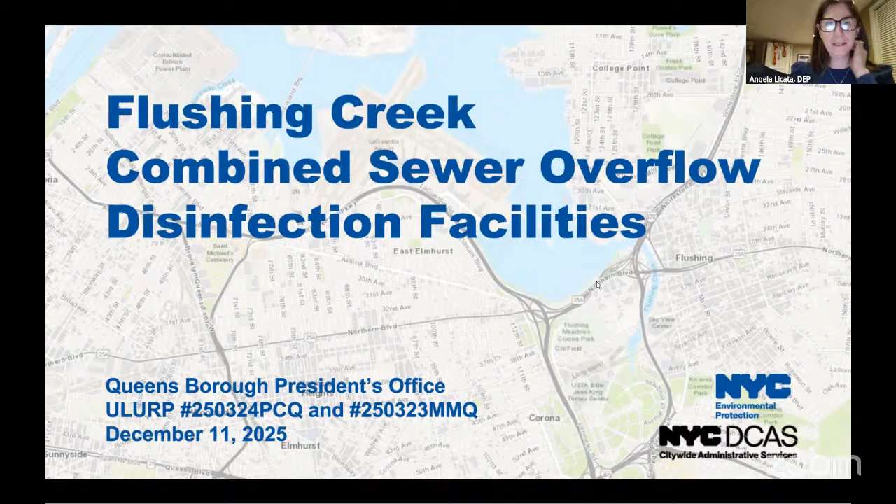Alfonso, are you there? Okay, then I will begin for Alfonso. My name is... Hear me? Angela. Sorry, go ahead, Alfonso. Sorry, my mute was acting up.

Good morning. This is Alfonso Lopez, Queens Commissioner for DEP. Thank you all for the time today. Just going to go through briefly who's here on the line from DEP. We also have Monica Harvey, Bureau of Engineering, Design, and Construction. Angela Licata, our Deputy Commissioner for Sustainability. Mitchell Wimbish, Bureau of Environmental Planning and Analysis. Keith Mahoney, Bureau of Sustainability. From Arcadis of New York, we have Timothy McDonald. And from AKRF, we have Carrie Sibeli. I'm going to turn it over to our Deputy Commissioner, Angela Licata.

All right, thank you very much for the introduction. We wanted to give a brief outline today to talk a little bit about the project purpose, our objectives, talk a little bit about how we have designed this project and provide you with some of the data that we have collected and studied. We will provide you with the analysis for the environmental documents and provide you with our conclusions. And then we will review the schedule for this project for its ongoing design and for its construction. Next slide, please.

So first, a little bit about DEP. Most of you will know that we are the city's agency responsible for providing drinking water services to over 8.25 million people within the city, another million people upstate in our watershed. And we also are responsible for distributing that clean, potable drinking water and collecting all of the wastewater. And that includes stormwater and sanitary sewage.

And approximately 60% of the city's sewer system is what is known as combined, stormwater and sanitary flow mixed together in one pipe. So again, 60% of the sewersheds are combined, probably another 30 or so are separated, where you have one sanitary pipe and another stormwater pipe, and about 10% run directly into the city's water bodies.

The problem with combined sewers, and this is a legacy problem in a lot of older cities, is that when it rains a sufficient amount, that system does not carry that flow all the way to our water resource recovery facilities for treatment. The city has 14 water resource recovery facilities, but when the flow exceeds 2 times their dry weather capacity, we have what are known as combined sewer overflows.

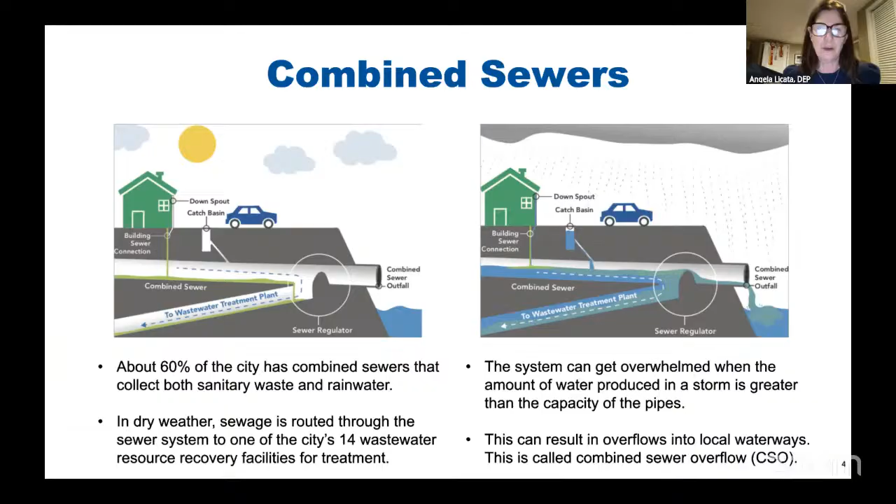So we have a consent order with the New York State DEC, and we are governed under the Clean Water Act. That's a federal policy. And what we need to do is to meet a series of best management practices, is what they're called. We want to continue to improve our water bodies until they can all meet a swimmable, fishable standard.

Now, having said that, that's a very difficult task to achieve because New York City is blessed with 520 miles of coastline, and our water bodies are vast, and we're really an archipelago. So we have a lot of water bodies to manage, and some of these water bodies are really quite man-made. And so getting them to achieve, like you would see in an ocean-fronting beach, a swimmable, fishable standard is again really quite challenging. But nevertheless, we have been developing programs to get us closer and closer to these goals.

And that is why we have proposed for Flushing Creek a disinfection program. Typically, under our CSO program, what we try to do is capture that CSO, detain it, store it, and pump it back to one of those water resource recovery facilities that I spoke about earlier once the rain event subsides. But in some cases, like in the case of Flushing Creek, that is a very difficult thing because we have over 1 billion gallons of CSO going into Flushing Creek every year.

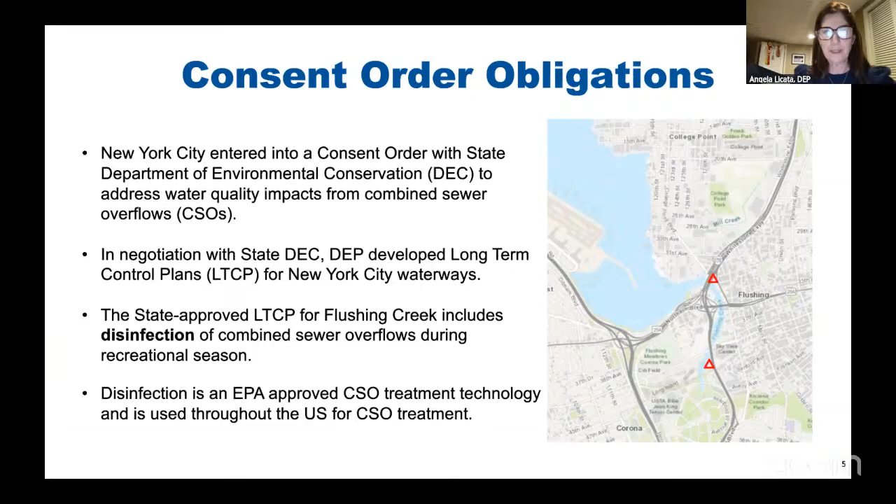Okay, thanks, Angela. So as Angela mentioned, the CSO program has a long history. It started back in the 1990s, and there were a lot of accomplishments to date. Flushing Creek was one of the largest ones. We constructed a 43 million gallon CSO retention facility just upstream of CSO outfall TI-10. So that's a massive CSO storage facility.

But even with that storage facility, there's still over a billion gallons going into Flushing Creek. Previously, it was over 2 billion gallons going in. So we significantly reduced the CSOs. But again, it becomes very challenging to try to reduce that remaining 1+ billion gallons.

Aside from that, we also have a very comprehensive green infrastructure program, and there's a lot of green infrastructure in this area. It's a huge sewershed upstream of Flushing Creek, and to date, DEP has constructed over 2,000 GI assets in this drainage area, and we continue to implement more GI. And citywide, we call this our baseline CSO commitments. This is prior to the long-term control plans. We've already spent over 2.7 billion in gray infrastructure, and we've committed to spend 3.5 billion in green infrastructure throughout the city.

We also made other improvements in this area, including some sewer upgrades, and we constructed a new parallel interceptor to convey more wet weather flow to the Tallman Island treatment plant. So again, a lot of investments have been made to date in this area, but it's still a challenging area. Next slide, please.

So as part of our 2012 consent order, we were required to develop what we call CSO long-term control plans. And we submitted 11 of these citywide. All 11 have been approved by DEC. And in this, we look at what we can do beyond what we've already committed to. So it builds off of that 43 million gallon tank and the GI we committed to. So this is what's in the future, what we can commit to.

So as part of this, we call this kind of a toolbox, but there's a whole different list of alternatives we can look at, including disinfection, which was actually required by our regulators, New York State DEC, to be included in the toolbox. So we have a lot of system optimization, like some low-cost things that were done previously, and those are much more cost-effective things.

As you start going down this list of storage, it becomes very expensive, as Angela mentioned. For instance, the Newtown Creek, that 50 million gallon CSO storage tunnel, has a cost right now of $3.4 billion. So it becomes very expensive. So again, when we have these alternatives, there's what's called the knee of the curve analysis. It's basically a cost benefit analysis.

So we looked at all these alternatives and saw how they reduce CSO, reduce bacterial loadings, and most importantly, we did an evaluation of how they improved water quality attainment with the applicable bacterial standard. So based on that, we selected the most cost-effective alternatives for each water body. It just so happened in Flushing Creek, disinfection was by far the most cost-effective. And that's how we came up with disinfection.

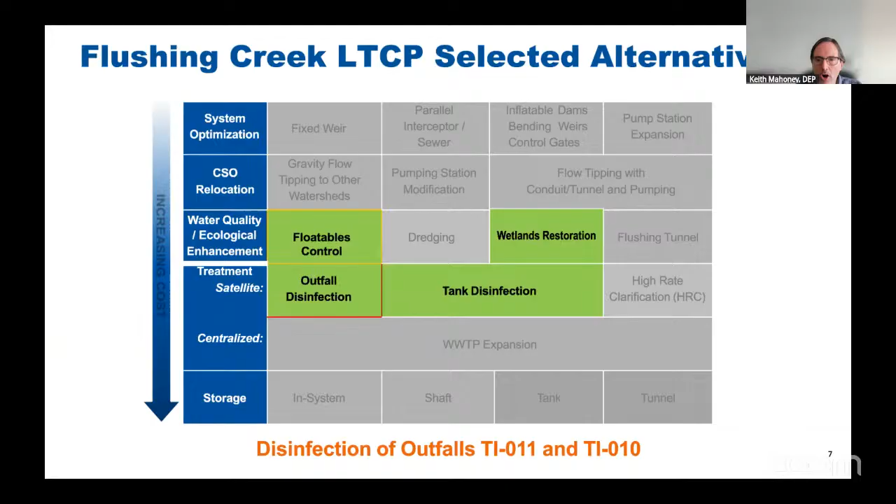So as part of this project, we have floatable control, disinfection and a long outfall, as well as disinfection at the existing 43 million gallon tank. And another project that we committed to outside of the long-term control plan was a wetland restoration that we're doing with the Army Corps of Engineers. So that's a project I'll get into in the next slide.

So these are some ongoing or planned improvements for Flushing Creek. Again, I just mentioned the Flushing Creek wetland restoration. So we're looking to construct 19 acres of habitat, including taking out some invasive vegetation, some regrading, placement of clean cover in the creek to grow the new plantings.

In terms of, I mentioned the GI we already constructed, we're also committed to additional GI as well as a cloudburst management program. So this is kind of a hybrid of GI with storm sewers, roadway improvement. It's really meant to help mitigate inland flooding, but it also has a CSO reduction benefit. So we're pursuing these citywide to try to address climate change and increased precipitation.

We also have ongoing throughout the city sewer separation projects. As Angela said, about 60% of the city is combined. It's almost impossible to make it all separate, but there are pockets where we have opportunities to separate sewers. And we're looking at some within the Flushing Creek area where we'll take some pockets of sewers, separate them, and send the additional flow to either Meadow or Willow Lake. So that gets the stormwater out of the combined system, but again, incrementally.

And I did mention this early green infrastructure program. Again, we're doing this citywide, and we committed to spending $3.5 billion by 2040. And to date, I think we probably spent about $1.3 billion or so.

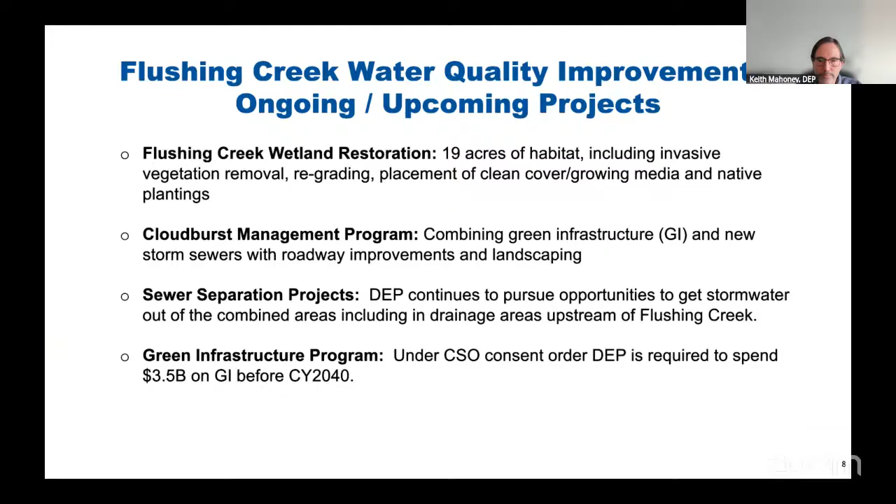This is just a timeline for the long-term control plan. As I mentioned, the CSO programs date from the 1990s. We started the LTCPs back in 2012 with the amended consent order. We submitted Flushing Creek in December 2014. We had public engagement. We had 3 public meetings for every LTCP to discuss the whole process, the alternative evaluation and the recommended alternative.

DEC approved the Flushing Creek LTCP in March 2017. We started design for this disinfection project in January 2019. And we're approaching design completion. And right now we're in that process where we're reaching out to the borough president and looking to get the lands and just proceed with this project. The next phase is construction coming up.

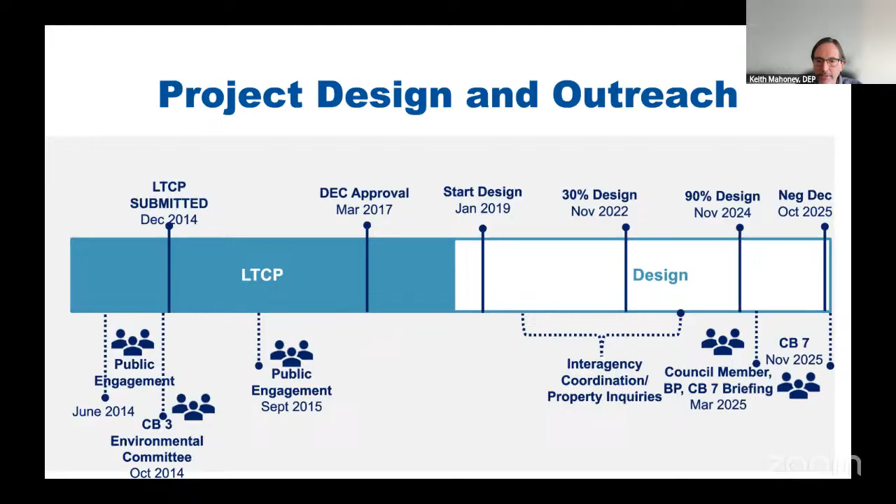And I'll hand this one over to Mitchell. Thank you. Thanks, Keith.

All right, so for this project, as we've been talking about with this disinfection, CSO is going to be chlorinated to kill the harmful bacteria and viruses that are in the CSO effluent. And then another chemical will be added to dechlorinate the flow to protect the ecosystem of Flushing Creek. And we are designing this amount of chlorine in the effluent, and we have a limit of 0.1 milligram per liter. That's the DEC's limit that we have to meet all the time in order to protect human health and safety during recreational uses.

So we're looking to construct 2 facilities. So on this map, the triangles are the outfalls. So that's TI-11 at the top, and then TI-10 at the bottom. And so for TI-11 at the top, we're looking to construct a new facility on 32nd Avenue, right below the Whitestone Expressway. That's a current traffic triangle owned by State DOT. And then for TI-10, we'll actually do the chlorination within the CSO facility that's here in purple on the map.

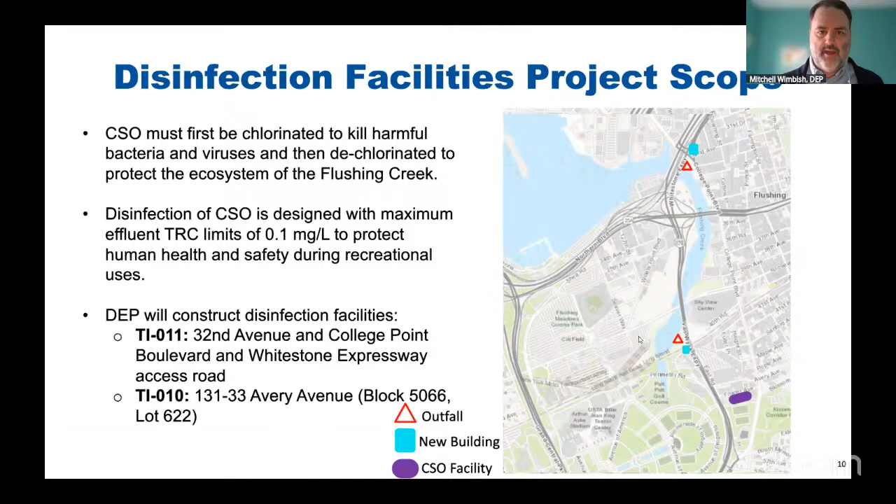And then the dechlor will be in our new building on Avery Avenue. And that is a portion of a lot owned by the Home Depot that we will look to acquire once we have approval. Next slide, we'll just go through the ULURP actions like I'm talking about. So we can see a little closer here.

So for both sites, we need to site select and acquire. And then for the TI-11 site on the top, we have to do a mapping action because it is currently mapped roadway, part of the Whitestone Expressway access road. So we need to change the city map so that we can make a new lot to build on. And then you can see below, we're just acquiring a portion of the Home Depot lot.

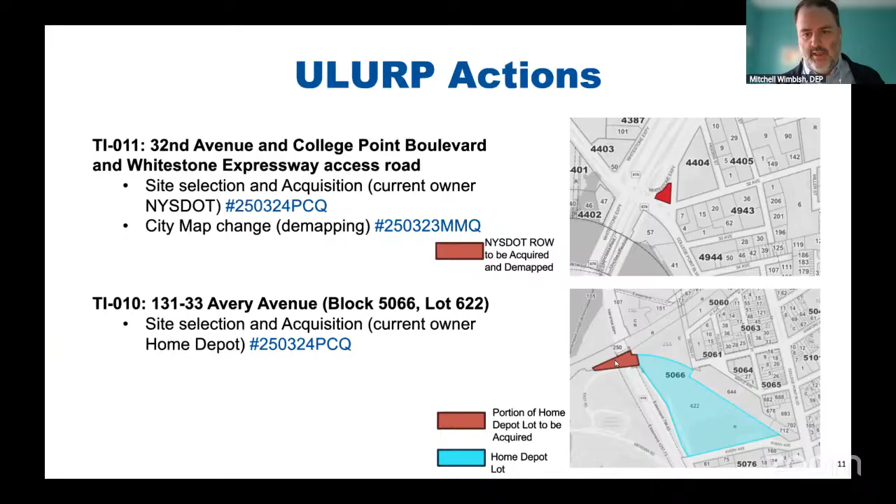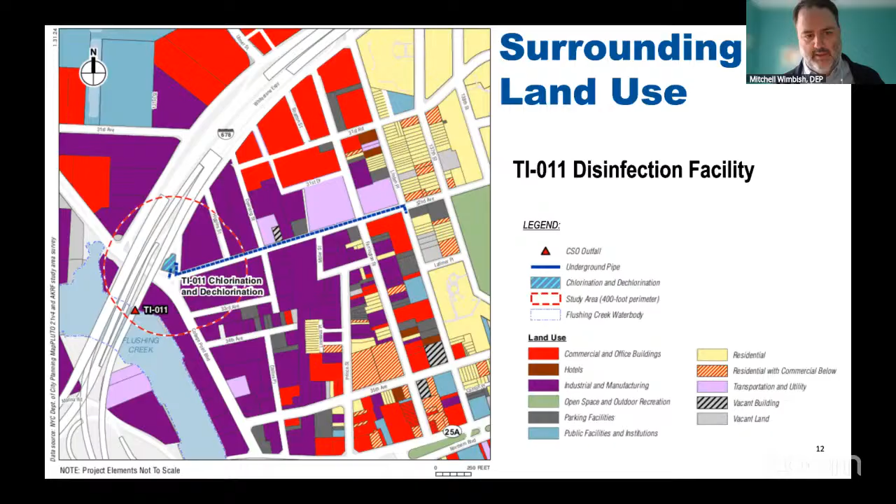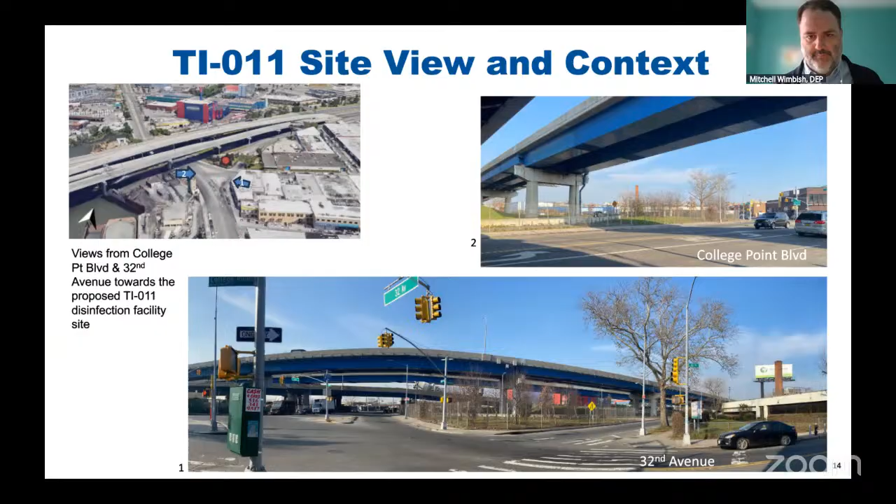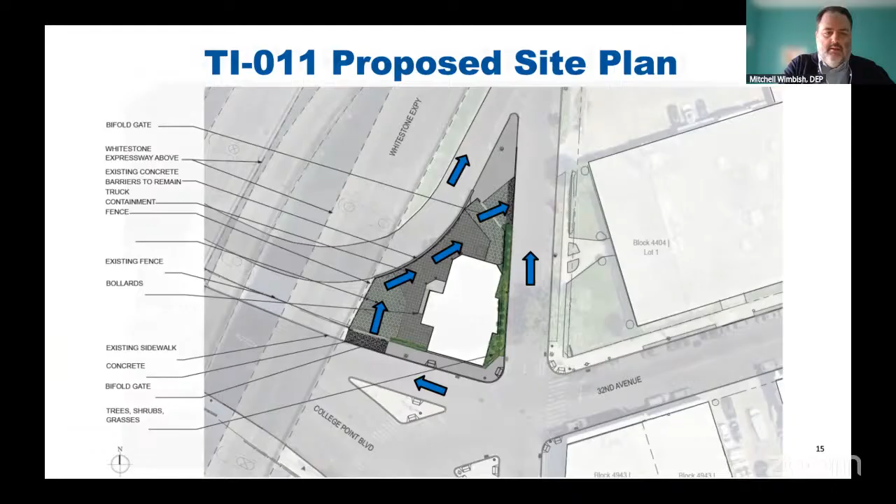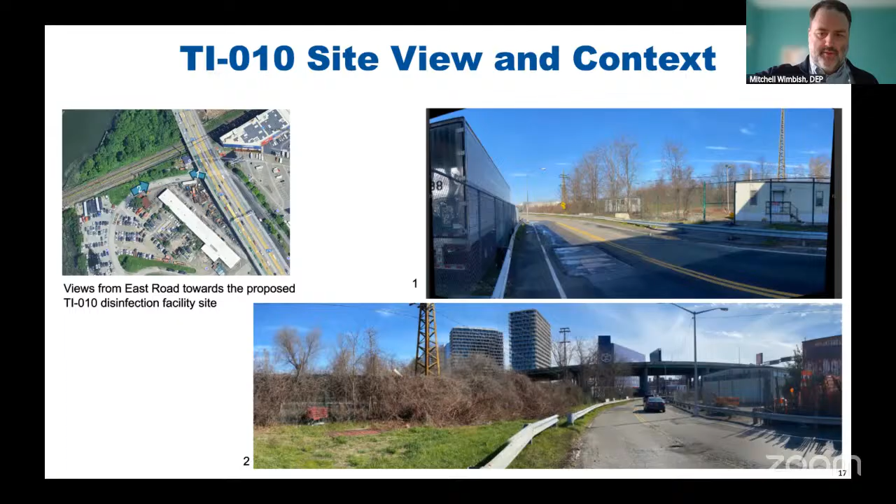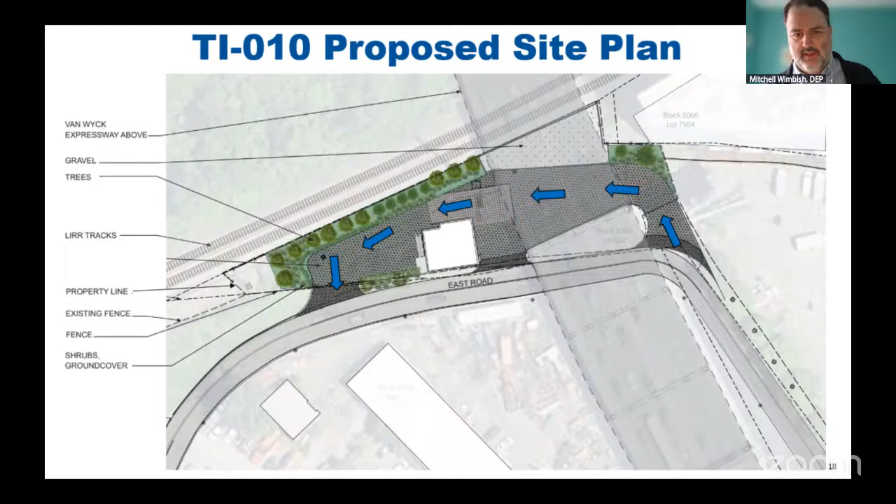Yep, thank you, Mitch. So Arcadis picked up where essentially Keith's team with the long-term control plan finished off. And it's our responsibility to now come up with the physical design of the new facilities and to figure out how they're going to be implemented and constructed to achieve the project goals. So to do that, one of the first things we did was we revisited some of the sewer system modeling that the long-term control plan team had looked at. And we built upon that and basically enhanced it to take into consideration future projections of population and then also what's happening in our environment with climate change.

So what you see on the right here, this is a map of the entire sewershed area for the two Flushing Creek outfalls that we're talking about today. That's highlighted in the red area within the map. And then the green represents the combined sewer areas and the blue represents the separated sewer areas. So as you can see within that red outline, there's still quite a bit of area that is considered combined.

And so we use sewershed hydrologic and hydraulic modeling to take a look at when it rains, what happens within that red area. Where does the rainfall go? What catch basins does it go into? What sewers does it get into? How much of it collects in the sewer system during some of these wet weather events? And how quickly does that water move through the sewer network and out to the outfalls? And also, how much gets to the two outfalls that we're concerned with for TI-10 and TI-11?

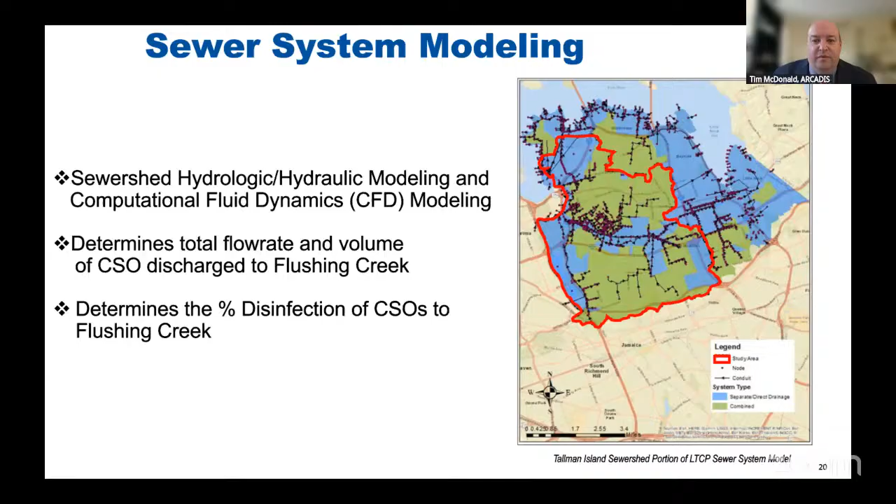So using that modeling data, we get a sense of what happens during a recreation season. The table here shows at a very high level for the two outfalls, the top row is for TI-10, the bottom row is for TI-11, how many overflow events occur during the recreation season that result in water going out to Flushing Creek. For TI-10, it's about 8 events in that recreation season period, which is from May to October of every year. For TI-11, it's about 23 events.

The reason being it's higher there is that in TI-10, we have the Flushing Bay CSO retention facility, the big tank, the 43 million gallons of storage that Keith referred to, that helps mitigate the amount of events that would actually overflow to the creek. From a durational perspective, this just shows the total duration during the recreation season for when these overflow events occur. On average, it's about 16 to 18 hours per event. Some of them are shorter, some of them are longer, depending on the rainfall intensity and the duration of the storms.

As Keith mentioned as well, it's about 1.3 billion gallons of water that goes to the outfalls for CSO overflows in the TI-10 system. In the TI-11 system, it's much less. It's only about 222 million gallons. So when we look at where we're adding the chemical and where we're targeting, we get a sense of how much we're able to disinfect. And in both cases, for both outfalls, we believe we can achieve about 91% disinfection of the CSO flows that are going to the creek. And in both cases, that exceeds the target that New York State DEC identified in the long-term control plan, which was to achieve 88% disinfection of those flows.

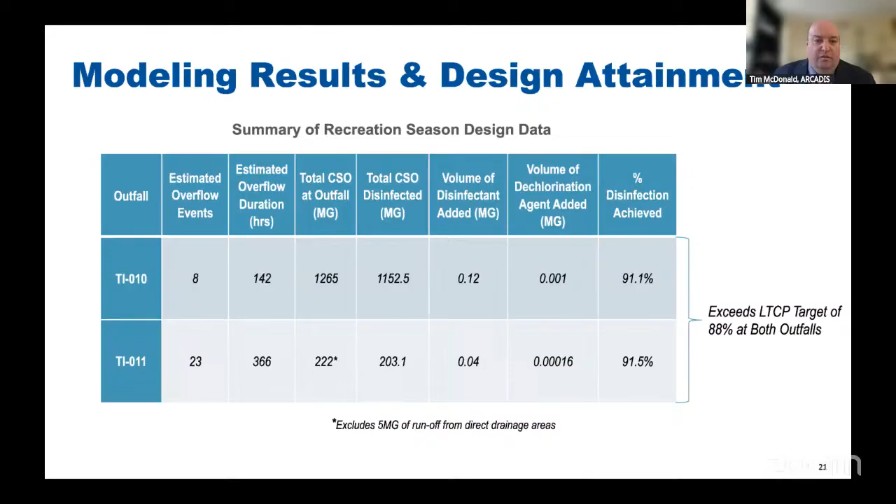And then just for comparison here, we also have a couple columns there where we call volume of disinfectant added and the dechlorination agent. And you can see the amount of chemical that gets added in relation to the amount of CSO flow that goes out to the outfalls is very low. It's orders of scale less than what goes out in terms of total stormwater flow. Next slide.

So just to give some understanding of how the system operates and why these facilities are being sited where they are. What we have here on the screen is an aerial view of the TI-10 sewershed area closest to Flushing Creek. The creek's in the upper left. Outfall TI-10 is in the red triangle. And then the blue shading there represents the sewer conduit and the sewer network that goes to that outfall. As you come back, you've got sewers that go down Avery Avenue and Fowler Avenue over to College Point Boulevard. The bottom center of the screen, the big blue area, that's the existing Flushing Bay CSO retention facility tank.

The water in the sewershed comes from two sets of conduits, which are in the right-hand corner of the screen. There's a larger conduit that comes from the Kissena corridor that runs under the Queens Botanical Garden, and then another pipe that comes from what's called the Park Drive East sewer that goes up College Point Boulevard. Normally these flows get conveyed to the Tallman Island wastewater resource recovery facility. In wet weather events, when the flow is too much for the treatment plant to handle, the flow starts to back up in the sewer network and it's directed into the CSO retention facility tank. The idea being that we capture that flow in the tank, and when there's capacity at the Tallman Island plant, the captured flow gets pumped back to Tallman Island.

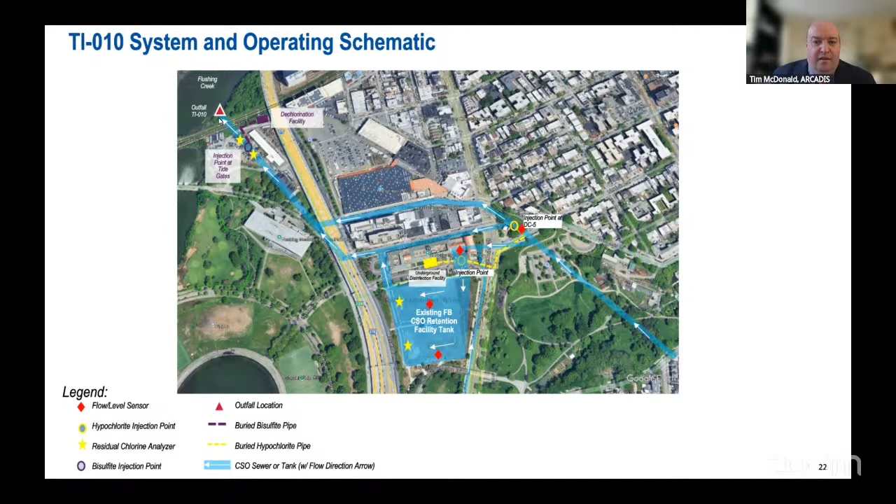So here's the TI-11 system. It's a little simpler. The big difference being that there's not a retention tank. So on the right-hand side of the page under Linden Place is the sewer that goes up to the Tallman Island Water Resource Recovery Facility. And so when it can't handle all the flow, there's a regulator that's called TI-R09 that's at the intersection of Linden Place and 32nd Avenue. The flow would overflow at that location into the sewer outfall pipes that go out to outfall TI-11 into the creek.

There's also flow coming in from the right-hand side of the page from some other upstream regulators. So when we see that an overflow is about to occur or it's occurring, hypochlorite would get injected just downstream of that regulator into the two sewers that then go down the length of 32nd Avenue. And then right about the intersection of College Point Boulevard, that's where we have those total residual chlorine analyzers to trigger and adjust the dosing of the sodium bisulfite to, again, make sure that we don't exceed the effluent residual chlorine limit that the state has imposed.

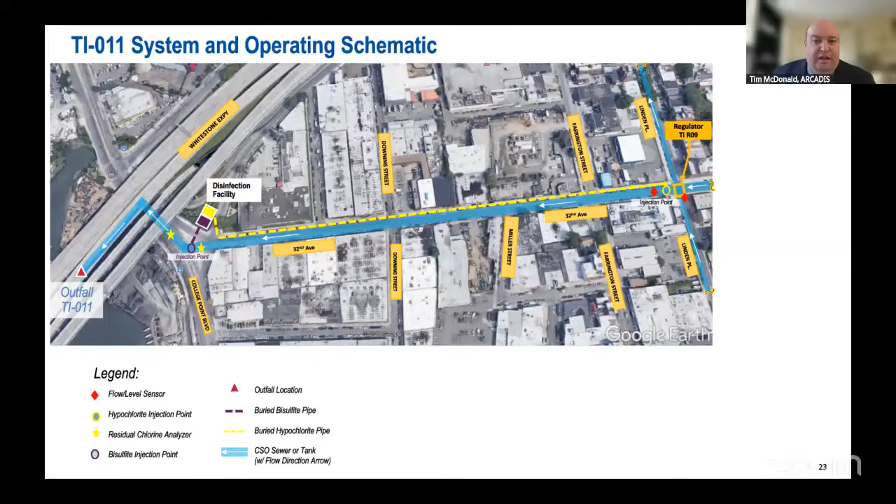Okay, so that's the reason for putting that in the adjacent intersection there to house both chemicals, because this is a very congested area and there's not a lot of opportunity here for constructing new facilities. Next slide.

So in the course of development of the project and also some of the various public outreach that DEP has conducted, there's been a lot of concern expressed from a safety perspective and the control of the chemical and making sure that there's not any negative impact to the aquatic biota in Flushing Creek. And DEP is concerned with that. And so as part of this project, we've designed a system whereby we've done all of that modeling that I mentioned earlier with the CFD, and then come up with a robust control system that's based on the same types of equipment and controls that the DEP uses at all of its treatment plants. So it's tried and true technology that's being applied to this case.

Okay, there's also some natural decay that occurs. And as that flow continues through the pipe, that uptake continues to happen and the decay continues to happen until we get to the point well upstream of the actual outfall pipe. And if there is any residual chlorine remaining that has not been taken up by the bacteria that's in the CSO, that's where we would add the sodium bisulfite to further react with the hypochlorite. And that reaction's fairly instantaneous. We have good mixing in the pipe at the locations that we're adding the chemicals.

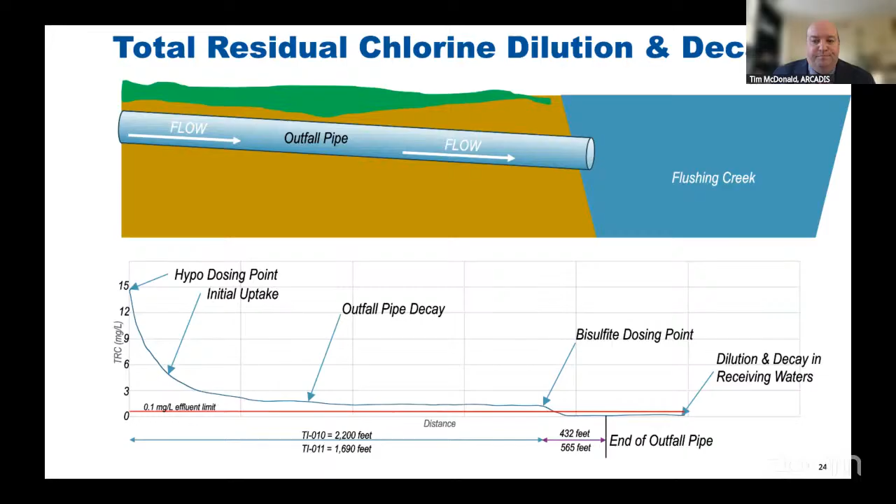And then with respect to public safety, there's been a lot of concern because we do have some buried piping that has to extend outside of the DEP's fence lines and into the right-of-ways to get out to the various locations within the sewer network.

So the piping that's going to carry the chemical, normally we would have what's called a double contained pipe. So basically you have a carrier pipe that carries the chemical, and that's surrounded by a secondary pipe around that. And that would capture any material that might leak inadvertently out of that pipe. And then in the annular space between those two areas, we have a continuous leakage detection cable that runs the entire length of the pipeline.

So if any chemical did leak out of that pipe, we could detect that, we get an alarm, and we shut down the system. It also can tell the operators to within 5 feet as to where that leak may have occurred, so they can go out and investigate it. In this case, since we're in the public right-of-ways, we're taking that double contained pipe and we're going to put it in a concrete trench box that will act as a triple containment.

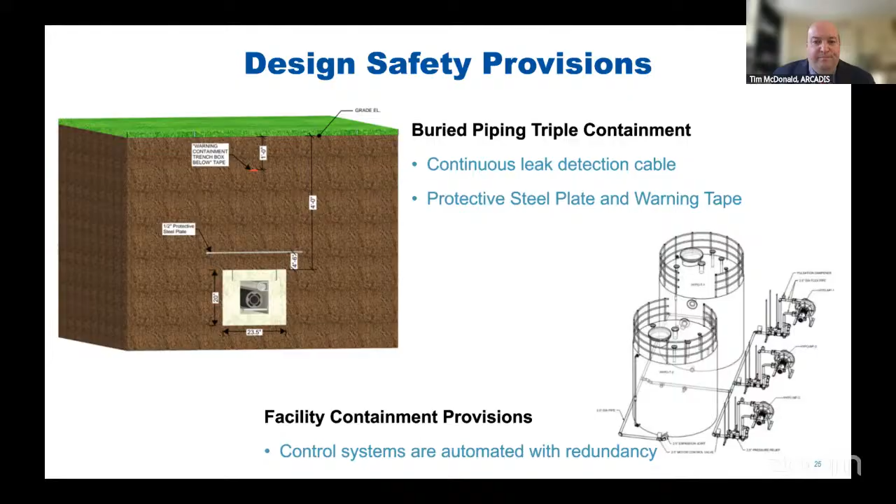Okay, and I'll turn it back to, I guess, Mitchell on the EAS conclusions, because I think Angela had to drop off. Yeah, thanks, Tim. Angela, if you're still here and want to jump in, please do so.

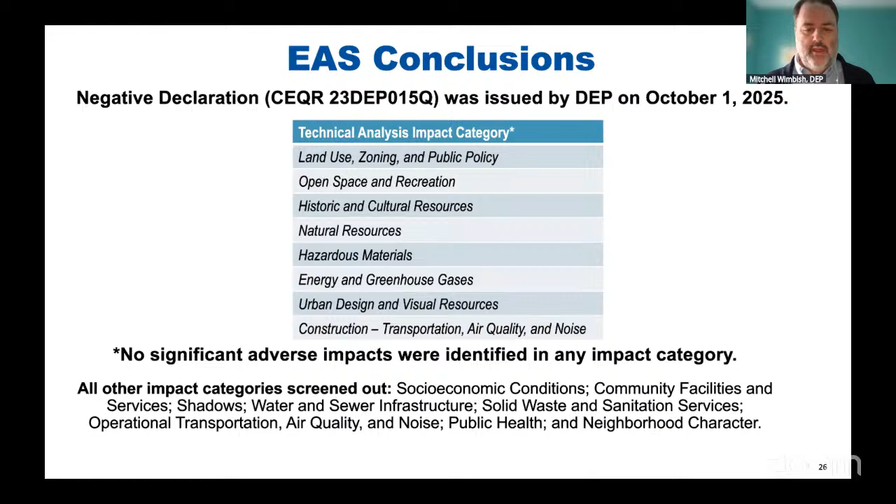But yeah, so we released our EAS in September of this year, and then had no comments received on it, and we issued a neg dec on October 1st. So therefore no significant adverse impacts were identified in any category. And then if you go to the next slide, we'll talk a little bit about our analysis on natural resources.

As Tim mentioned, we did this very detailed modeling work to really determine the minimum required dosing rates to achieve disinfection, because we did want to minimize the amount of chemical use. And we know that any chlorine that's still in the water does have the potential to be harmful. So that's why we're using both the design to have that be the minimum amount necessary, and then also using the sodium bisulfite to remove any remaining chlorine.

And as talked about before, we have both the analyzers to tell us how much chlorine is in the water and flow meters, and those are all giving real-time data to the operators so that we can adjust the dosing as storm events are happening. And we looked at other places where this dechlorination process is used, in places like Seattle that has wet weather treatment stations that disinfect and dechlorinate CSO flows that don't go to a traditional treatment facility.

And we also know that DEC has permitted this in several other places throughout the state. And often ours will have a lower allowed limit, that 0.1 milligram per liter of total residual chlorine. That's a lower limit than a lot of the other facilities are using. And also, DEP has so much experience using chlorination and dechlorination at our treatment facilities, which are run 24/7. And we do have a higher limit there that we put into the receiving waters, and we haven't seen real problems with the aquatic life.

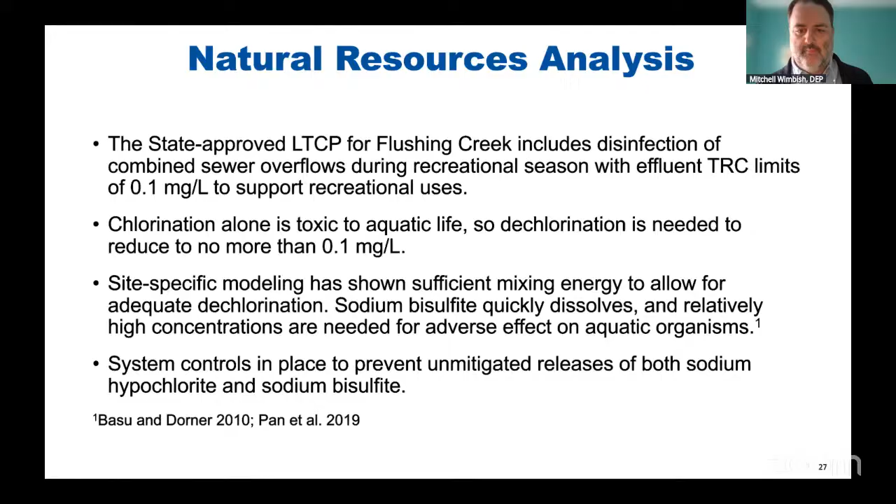And then just to highlight, I don't know if we talked about this before, this disinfection would only be happening during the recreational season, which is May 1st through October 31st. And that's really to highlight the benefits of this project, which are to remove those dangerous pathogens and viruses that are in CSO, so that people who are near the creek wouldn't become sick due to exposure to those pathogens.

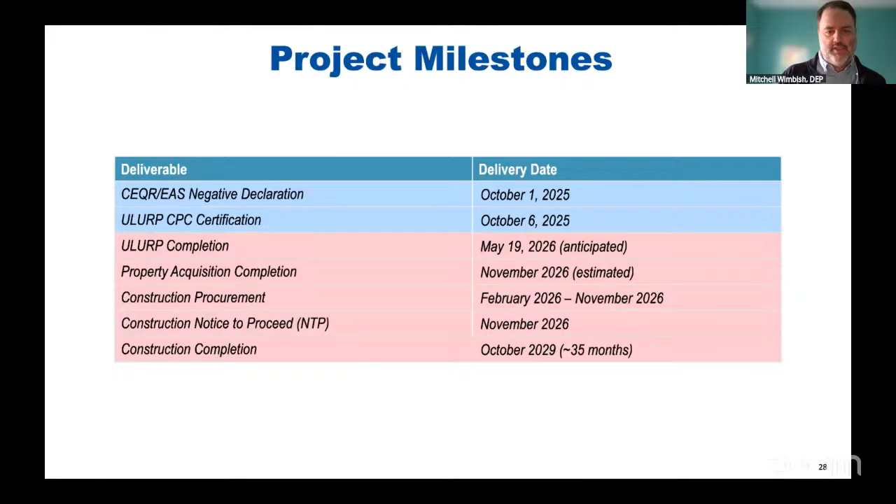Okay, thank you so much, applicant team. That was a very comprehensive presentation, a lot of information to parse through, but I appreciate it. And I appreciate that this long-term control plan has been in the making for a very long time. So I do have some follow-up questions. My first question is an overarching question that I think you did touch on, but I do just want to point out. So this disinfection facility will treat the water, but there's no plan to address the fact that billions of gallons of CSO will still enter the creek, which will include trash, physical trash.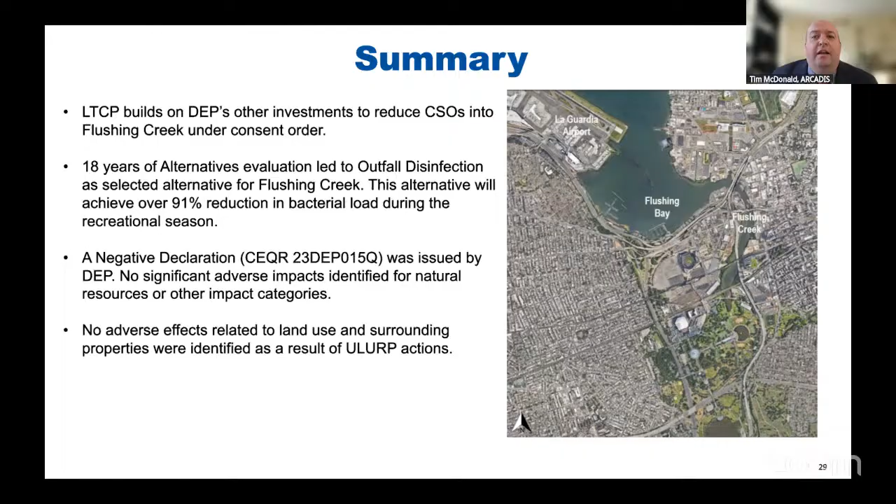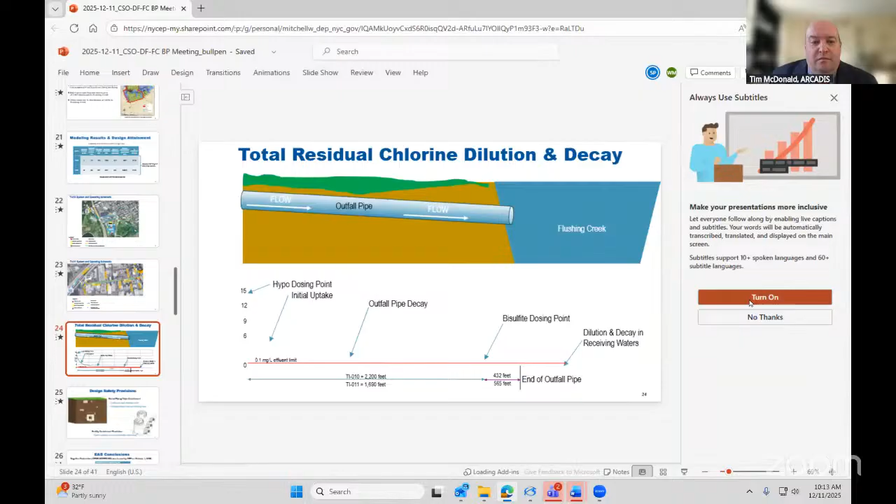Sure, I can handle that. So from the modeling, the time frames will of course vary depending on the size of the storm, the flow rate, and the duration or intensity of a storm. But in a worst case scenario, when we look at peak flow rate through the system and low tide in the creek, which is the shortest amount of time that the CSO flow would be in the pipe, we have a minimum of at least 6 minutes. And typically the durations are higher. That's the case for the TI-11 outfall because there's no tank and the pipe is a shorter length than for TI-10. TI-10's duration is generally higher, usually on the order of 10 to 13 minutes minimum. And it would be longer if you have a high tide or a lower intensity rainfall event that doesn't result in such a high flow rate.

And just to add to what Tim said. For the chlorination, that's where you kill the bacteria. That one is dependent both on chlorine concentration and detention time, so they call it CT. That's why we try to get as much detention time as you can in the outfall pipe. The sodium bisulfite, which is added to take out the residual chlorine, is instantaneous. So that's towards the end of the pipe, and that's a pretty much instantaneous reaction. Correct.

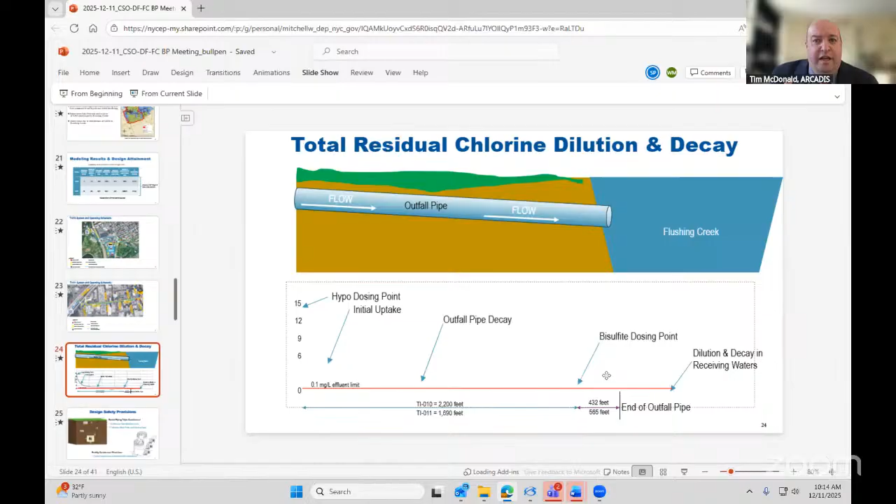And just to add to that, after the bisulfite's added, at worst case, which is minimum time in the pipe, we have around 2.5 to 3 minutes between when the bisulfite gets added before that water gets to the end of the outfall pipe. So at other times, the duration could be longer. Again, it depends on the flow rate going through the system.

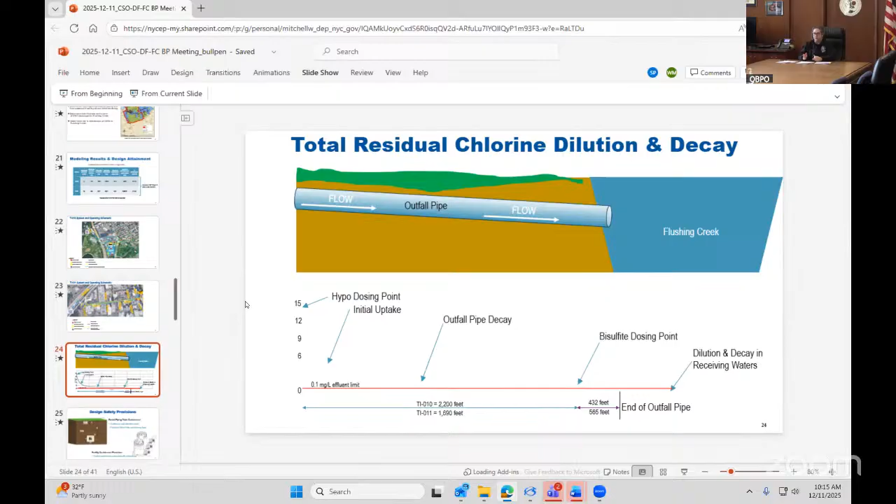Got it. Excuse me. So in layman's terms, I'm not an engineer, so excuse me. Just to understand the stages, the chlorine is added to the water, and then as it moves through the pipe, the sodium bisulfite is added. And so before it reaches the creek, there are these TRC analyzers that read the amount of chlorine in the water that then allow it to pass into the creek if it's under the limit. Is that right? Correct.

So what we do is after we've added the hypochlorite and now the treated water is moving through the sewer network, there's two sets of total residual chlorine analyzers. There's one upstream of where we add the sodium bisulfite. What that analyzer does is it tells us how much residual chlorine is remaining, and the control system will do a real-time calculation to figure out how much bisulfite should be added to react with that remaining chlorine to get it down to 0 or below the limit that the state has imposed.

Then there's a second residual chlorine analyzer that's downstream of the bisulfite addition point that would measure if there's any remaining residual chlorine in the system before it goes out to the creek. And that signal can also be used to tell the system, hey, we're not adding enough bisulfite, you need to add more. Or if there's 0 residual chlorine, it can also fine tune the system to reduce the amount of bisulfite added. Right, it's basically optimizing the system, but reacting in real time to what's happening in the pipeline. Okay.

Understood. And so as you went through the backup systems and spoke about the automated with redundancy, the final fail safes, does that plan or that modeling include the event of superstorms or hurricanes that we might encounter in the next decade or so? Sure.

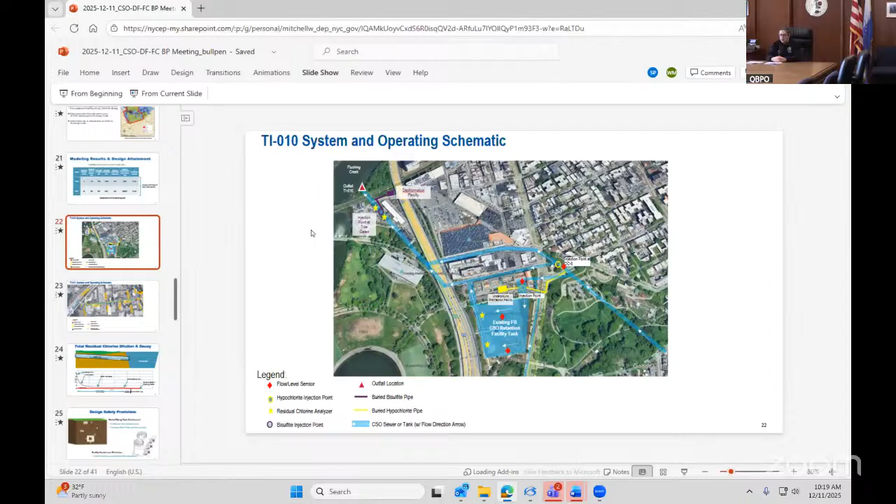Thank you. So seeing that there are no other public speakers on these items, the hearing is closed. So thank you, applicant team, for your presentation. Our next scheduled hybrid land use public hearing is in the new year on Thursday, January 8th, 2026, starting at 9:30 a.m. Thank you again, everyone, for joining us, and have a nice weekend.

Thank you. Happy holidays. Yeah, thanks. Thank you, everyone. Happy holidays.